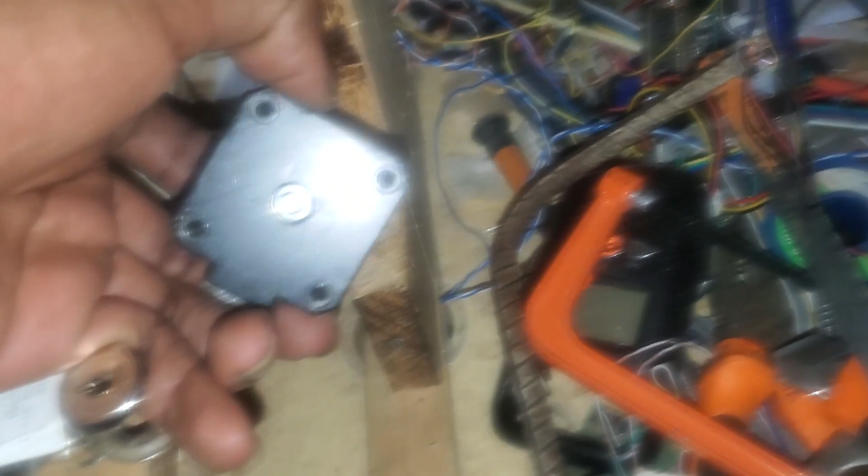Either that or I hadn't tied these nuts, so the torque it was giving me wasn't enough. It was here, it wasn't raising. Plus again this wood doesn't dampen the vibrations, so rotation was slightly difficult.

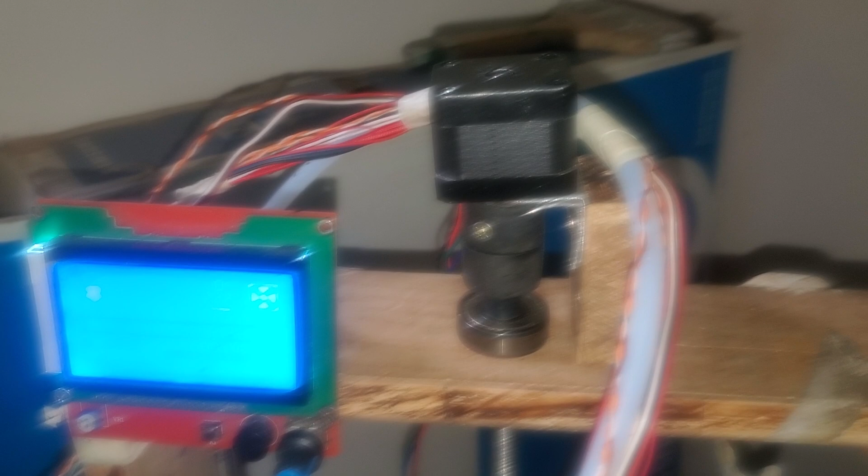This one, when I mounted it in the same place, at least it was giving me some movement, but if I was going like 10mm down, I couldn't achieve going 10mm. I was achieving like 8, 9. So I was seriously skipping.

Seeing that, I just saw that the imbalance in the weight is just not good enough. So this is the new mounting location. I'll have to cut this thread.

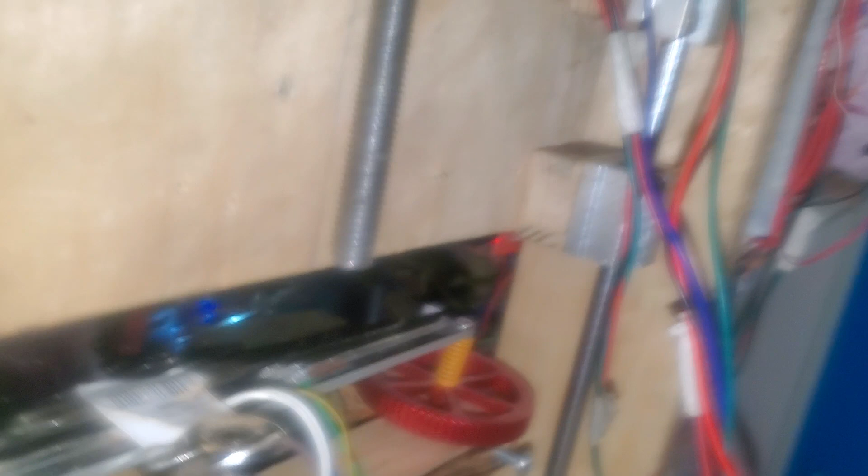As you see, there's an overhang. Currently, I've homed every axis to the minimum, so at least it's working. Even this one, as you know, part of this rod towards the back ain't working well, but with this new homing location, it's reaching its spot.

I've applied new tape, this masking tape. As this thing rotates, it wasn't gripping well, so it was roughly cutting as it rotates. It literally cut, so it's getting weaker with it. I'm sure I'm gonna replace that with time. I need to figure out what to do there, maybe eventually just drill something of the right size.

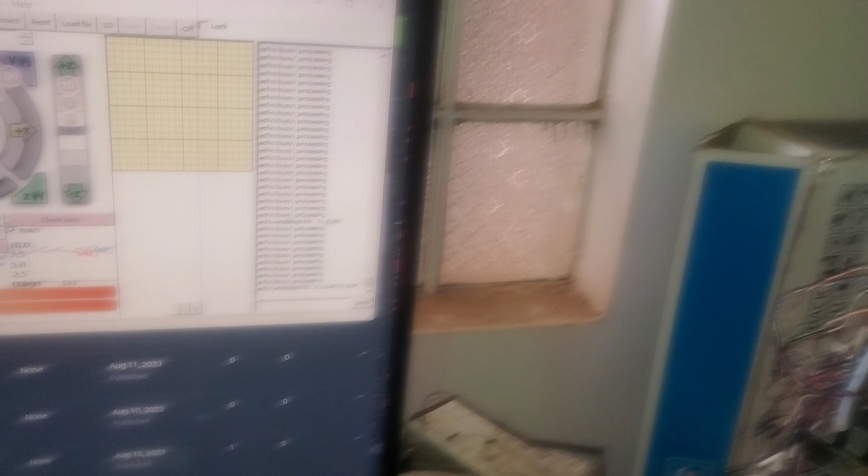Obviously, I've inverted the stepper. Let me show you. I've just inverted the stepper, one stepper only. So you can invert the stepper direction.

So for the Z, it's inverted because it's flipped. Originally, I wanted everything to be straightforward, upright, empirical. But as you've seen, I think maybe the force was the thread sitting on, everything was sitting on the shaft. At least this way something is hanging. So the end stops obviously are still in the same position.

So the plan now is to move all the axes to the max and then home it. After we home it, we're gonna speed up, roughly double the speed, and chase speed until we see where we start skipping. Where you start skipping is where you're gonna set our speed at.

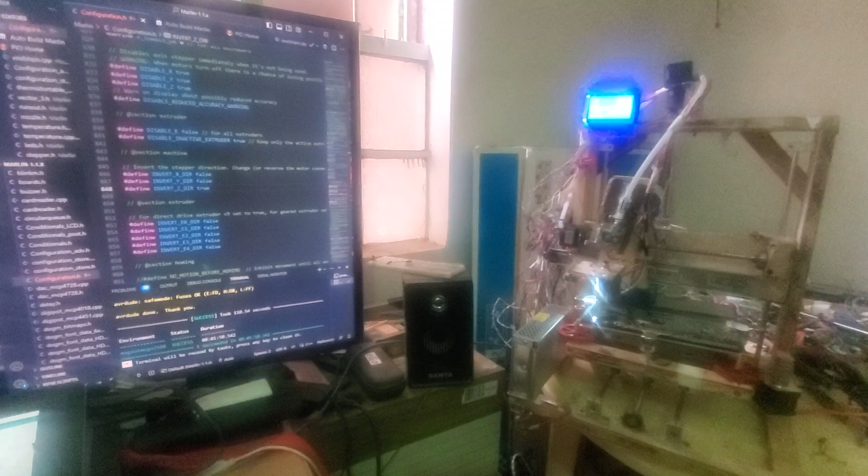I'm watching some podcast here, sandwich podcast. But yeah, it's gonna just be in the background or something like this.

So let's do this stuff. Need to return that back, bring this guy back here. There's some glare somehow, hope you just make do with it.

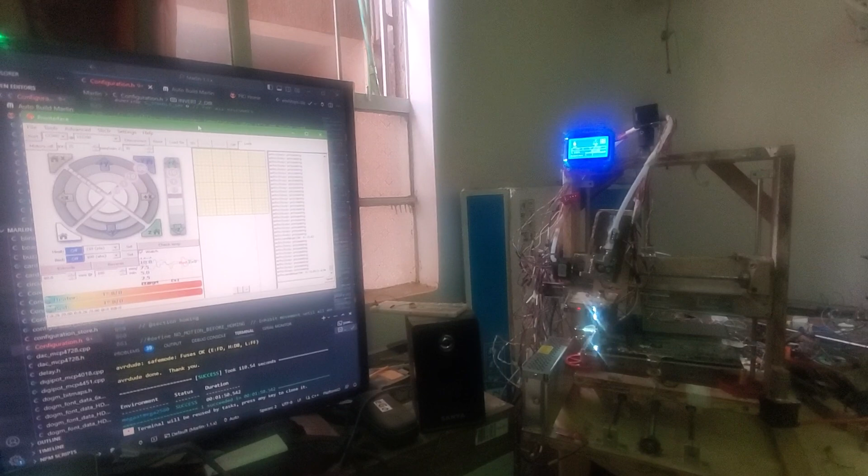So we're gonna start with the X, move 100. I'm gonna move the printer back to its better location. Let me just make sure nothing is in there.

So here, roughly, this is my line. This other line is unusable because the thread can't move past there. But I'm waiting for the new threads. I'm gonna obviously replace this, and this. This I'm gonna figure out what I'll do to achieve more travel. I might even mount this guy here.

But this, at the moment, is a better location. Because if I move this thing here, I'm gonna make the gantry heavier. So let it just stay here to reduce weight.

With the other builds, I saw a mechanism, the CoreXY mechanism. So I'm gonna use a core Y mechanism. I'll remove the motor from here, put it somewhere low. I prefer things to be low because of CG. Then put a belt that shifts with the gantry as it moves up and down. This will remove the weight from the motor off the gantry.

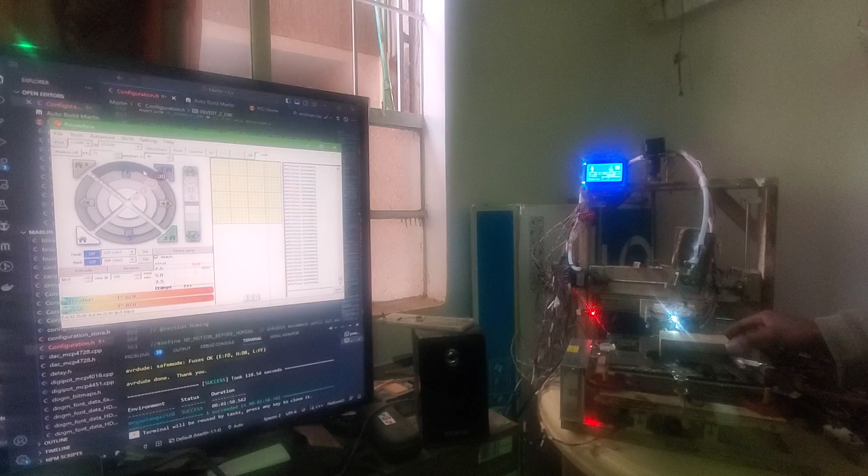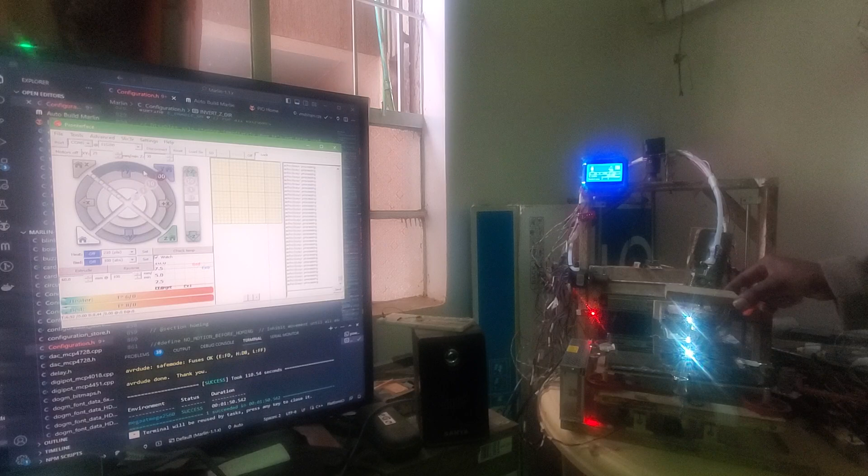And then height was 110 - I had a height of, because it has hit the end stop, so yeah, 110. So roughly 110 is up to here. So that's the maximum rectangle that I can print from here to here. That's not bad size, that's a good object.

Let me see what I can print here, something common. Too thick, slightly too thick. This is the maximum.

Infinix Z05 roughly fits, so I can print a phone cover comfortably. It has maxed out, this is maximum. Actually, I didn't even consider this - so from end stop to end stop, I have 150.

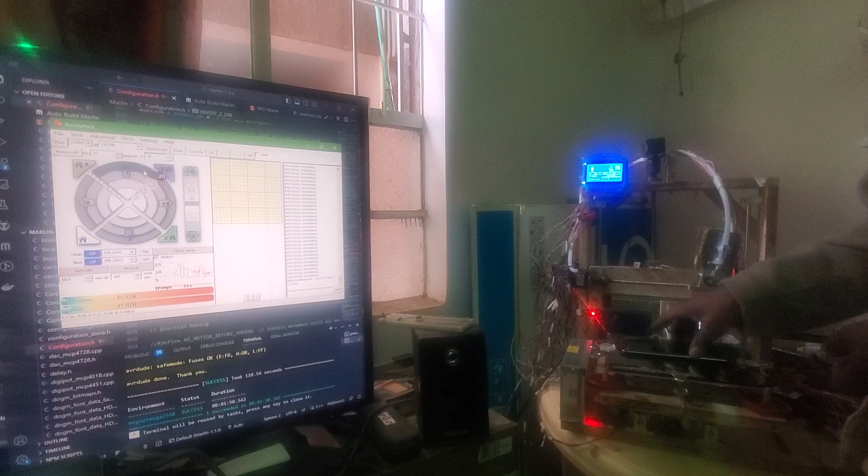Let me look for something I can print. A calculator, that's big. A remote, that's big. A mouse - obviously, a mouse can print. So yeah, I can print 3 mouses stacked upwards comfortably.

So let's go for the Z. After that, I'm gonna use the auto home button, the all-home button, this one here, so that I see it homing automatically.

After that, we're gonna now start using - I'm gonna start checking on the probe. The Z moves in steps of 10. So this is the second turn.

We saw I had what, 150? Not 150, one time. I'm supposed to click 11 times. I'm gonna click roughly 10 to 12 times. This is the third one.

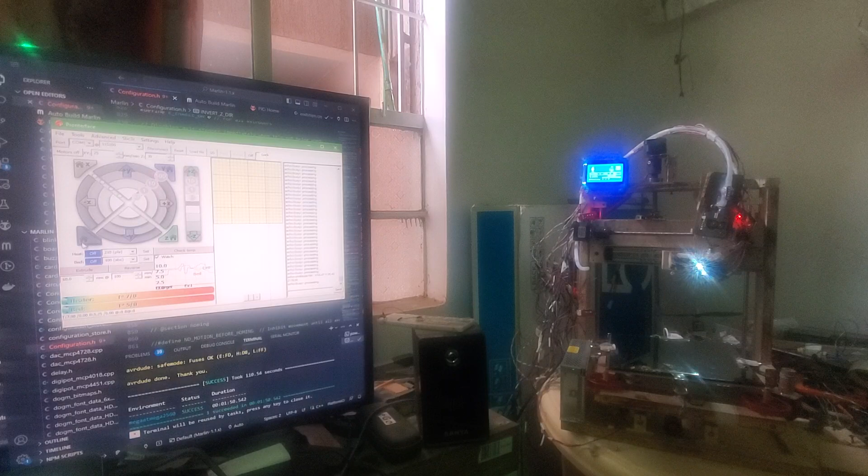Oh, it homes one axis at a time. I'm gonna change that in the code because I can't remember the homing speed, but its homing speed is slightly high. Good sign, you can bump up the speed.

I hope you can see the jerk. There's a form of jerk. It's as if the motor is stopping. If you can just match up the accelerations for it, you can almost eliminate the jerk.

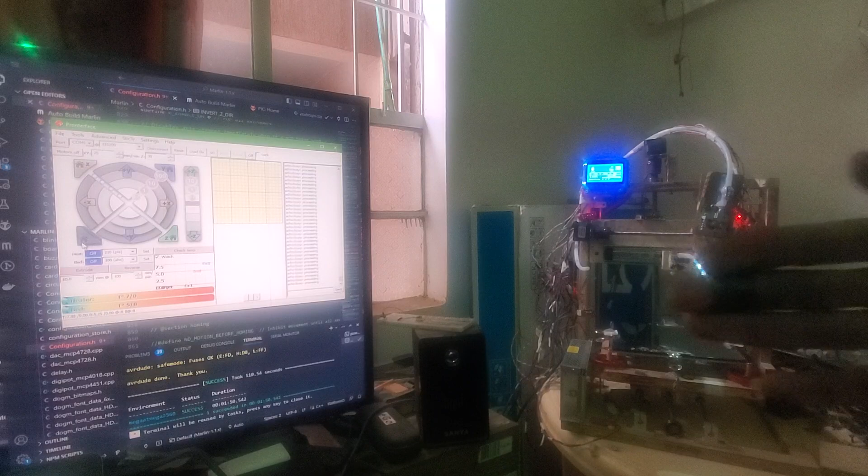The bed is dancing. It has hit the end stop, it has bumped, it's now going back. Maybe that bump is much. It's a bump of 5, so the X has homed.

Let's see the Y. You have seen, it has sagged, apparently. Then the stop has stopped being depressed. But I don't think it's that much. I don't think it will affect it.

So I have to consider my warping of my gantry. Not my gantry, my arm. Oh yeah, my gantry, yeah, my gantry.

Okay guys, I'm thinking of a robotic arm, but that's like a project that I'll do in like 10 years time. Let me first do this printer, then a CNC, then a plasma cutter.

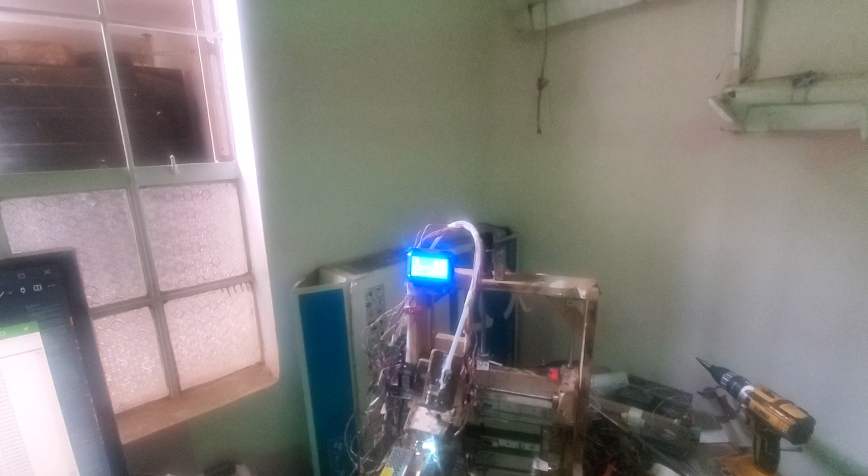But that's just moving one side. Now you can imagine printing a whole thing. So let me bump up the speeds. I'll keep informing you. So yeah, let me pause. I'll double check it just right now. No, just do it straight. Specific.

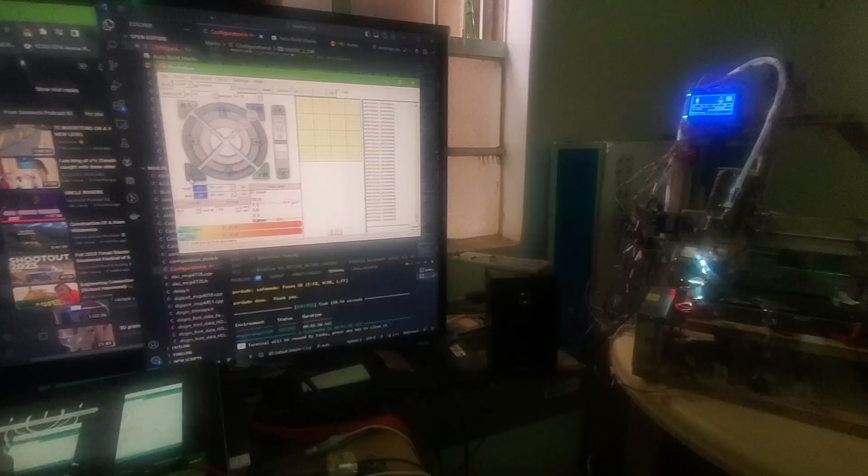I need a 50. I don't know where I get a 50. 25, so...

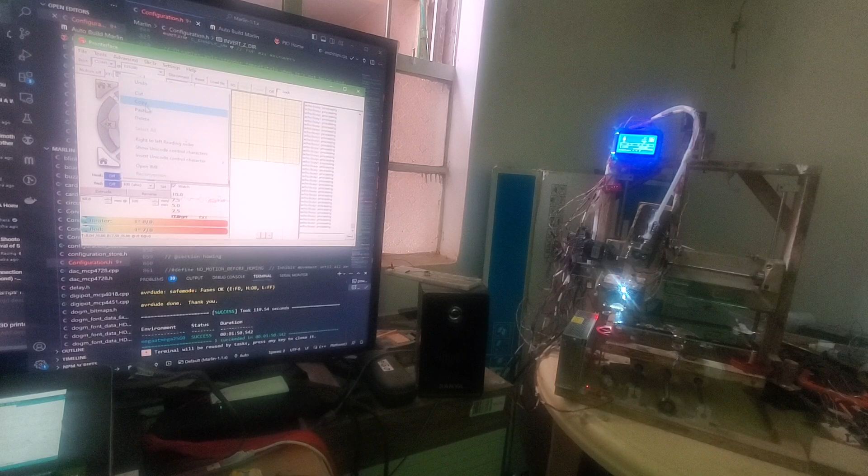Putting both of the speeds at 50-50. Originally it was at 25-30. Okay, here we go.

Okay, we are moving. And as you can see here at the far edge of the ridge, those end stops are really tight. These things are consuming a lot of space. Those clips.

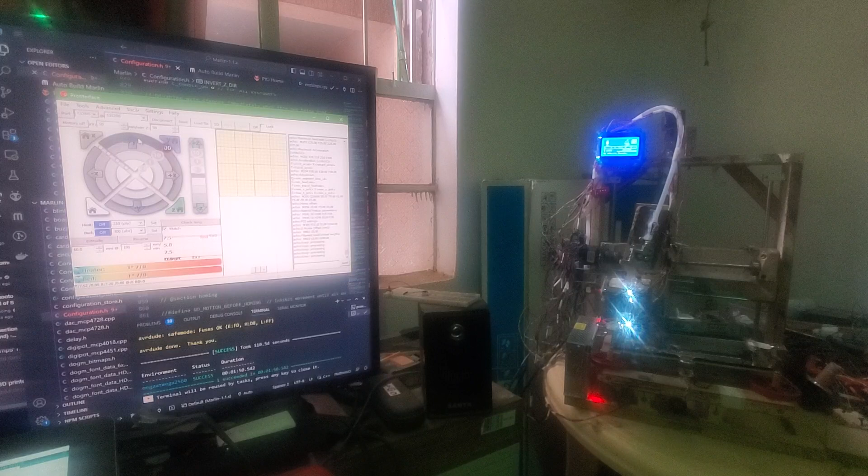Let's go further away. Okay. Just a good sign. I think I can achieve 200. I wonder how the Z will perform.

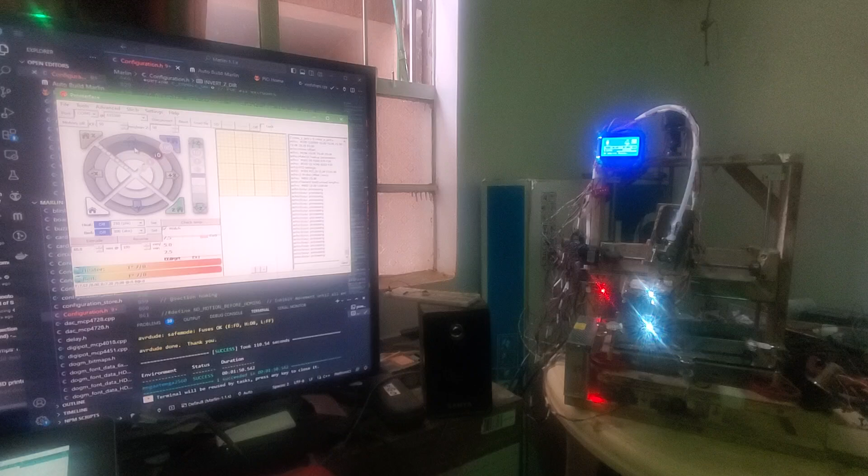I need to lube this stuff. I haven't lubed it. I'll just lube it. I'm gonna use just normal lube, the one for bicycles. General purpose lubricant I use for sewing machines, bicycles, and domestic use. Yeah boy, domestic use. Because this is totally a domestic build.

But I still have this in the name of cooling, so it's engine oil.

And my tube is sagging, so I think I might eventually end up cutting it. Might be too long. Even if I put on like an enclosure for it. And the Y axis box, that's the why. So easy.

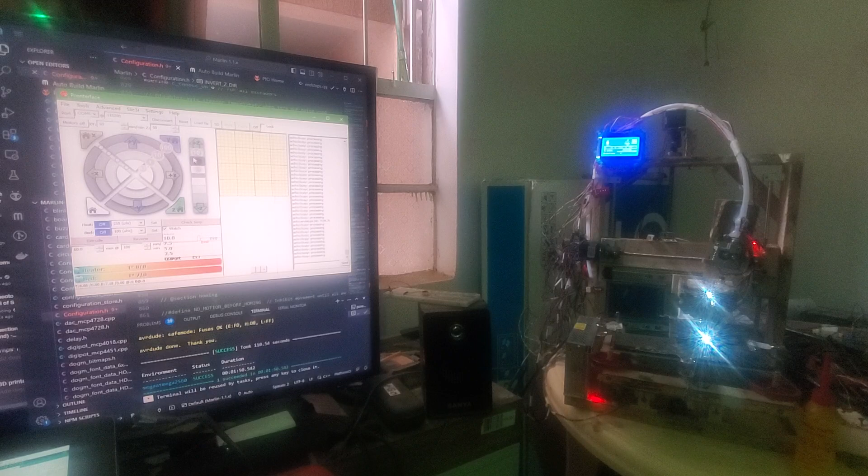Okay. Yep, we are skipping. Not really skipping. I like to call that a skip. So let's know if you're skipping. That's one. Pressed it once. Last time we counted 11. 1.

I think the Z, you can't bump the speed that much. 2. This is giving me chills, man.

Oh, also one of them I noticed I hadn't tightened this thing. The nut was loose. It has stopped too. This is 3, isn't it? 2, it's confirmed.

So 3. We are either at 3 or 4, so but I'm gonna say 3. You're skipping heavily. Yep.

50 is just too much for Z. I don't even know why I'm rushing the Z. Because I'm doing a layer print, so I don't really require the Z too.

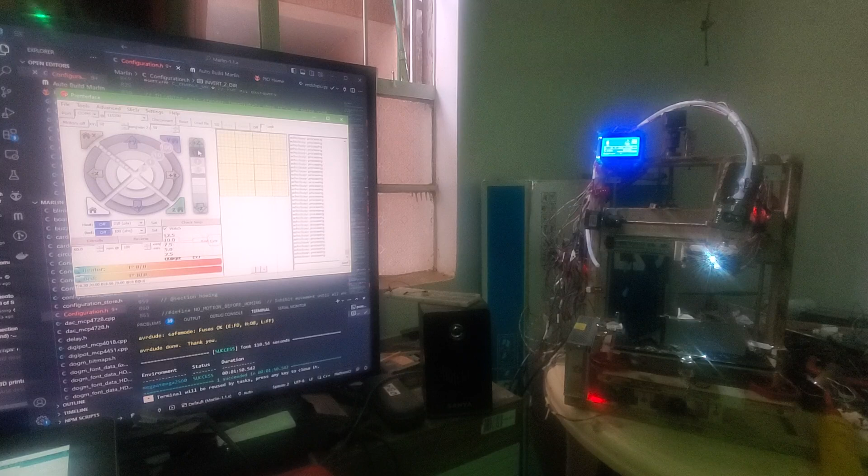Let me say now we are at 11 now. Hope you can see it's struggling to move. It's just vibrating.

No, 14. 15. Hey, I think I'm just gonna maintain it at 30. Let me look for a 30.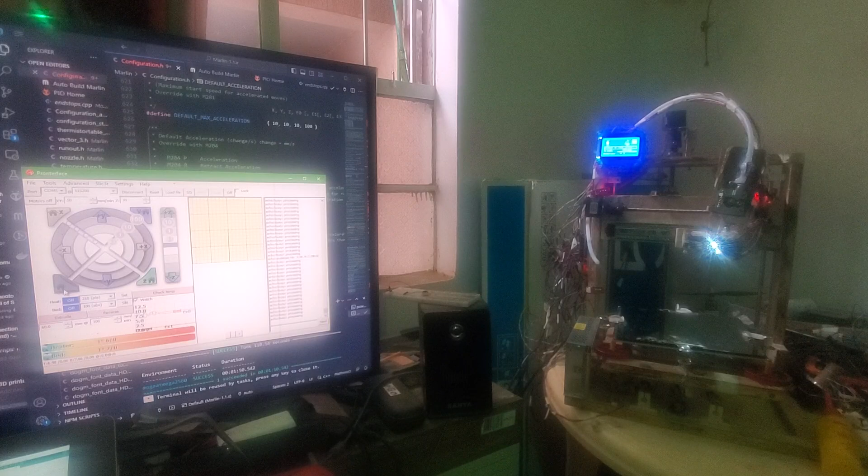That's for the X and Y. For the Z, just 30, 30, 30, 30, and you're homed. After we've reached 200, might double the acceleration for the X and Y. For the Z, I'm not gonna touch it.

I can't wait for 100. Let me even copy it right now.

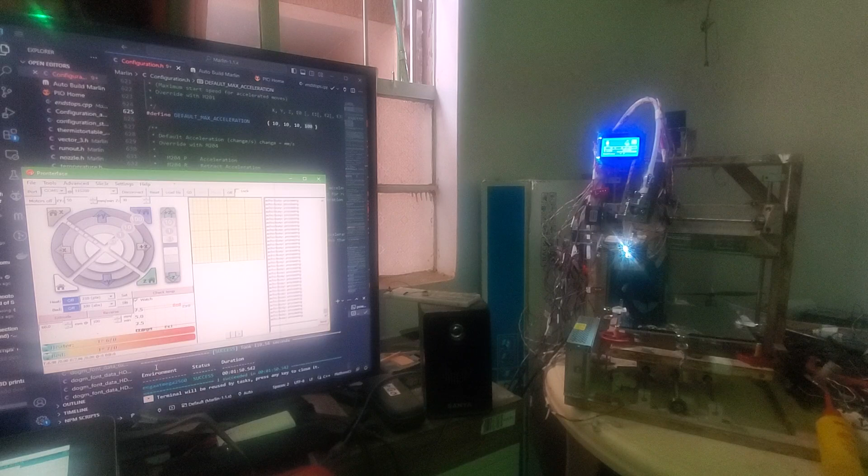But I'm at 30. See, if I get stuck going down, this bad news means things are getting loose. Let me just show you how much this thing is dancing for me to achieve movement.

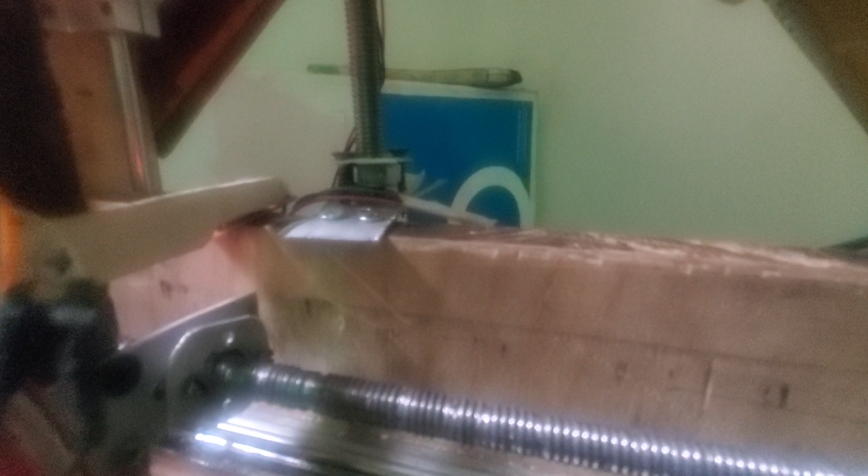This thing needs to be that loose, and it's getting loose. I untightened it, because if it's tight it doesn't hold. Either that or it's getting loose, and I don't think it's getting loose because I added some straps to tighten it. It's getting loose.

Okay, these are some of the few things I need to maintain. It's even nice I had taken a close look at it.

That's a form of maintenance issue, something has sort of worn out. Is it warming up? Is it up slowly?

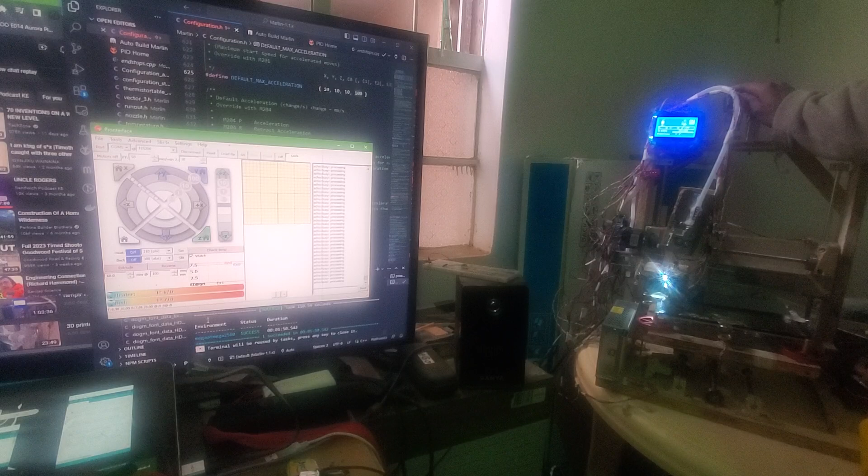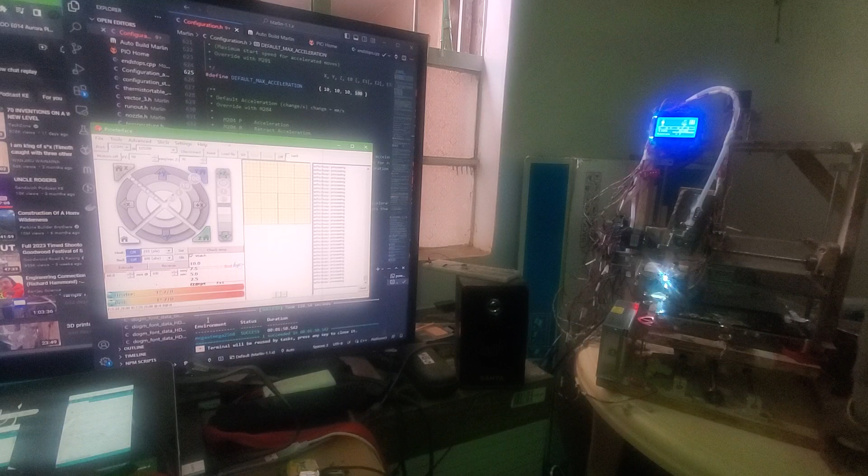Has it hit the end stop? It has, it has hit the end stop. Let me tighten, so that we can, or if you can increase the speed.

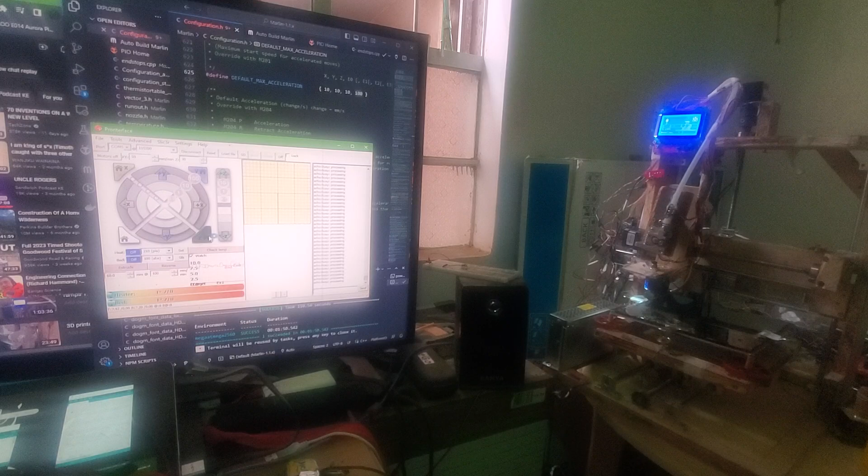It just, wait, just about to start to feel that. And we home it. Still stuck.

If it's too, goes too tight, it goes. Switch. Let me just a minute. Let me see if I can. What's up?

Let me just assume that axis for the moment. Let me see what I can get up this. I think maybe the bump up has affected my PWMs.

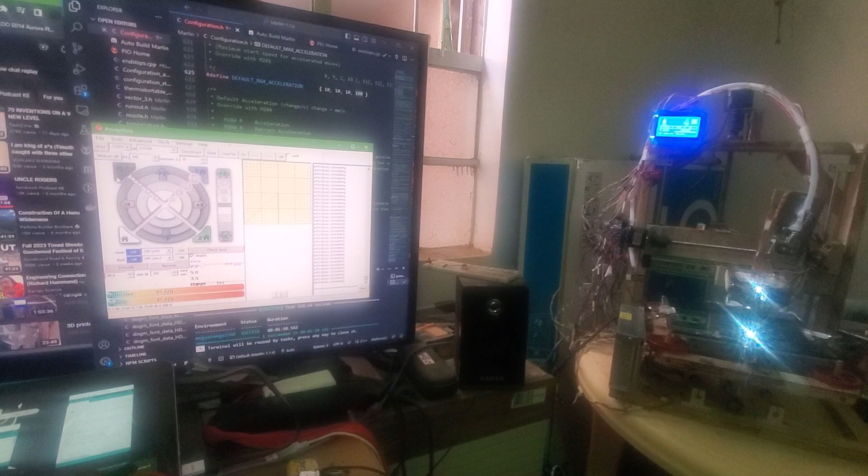That doesn't look like 100, it looks as if it's going slow. But the X, so if I'm printing something long, apparently this is the short axis. This printer is becoming complicated by the end of the day. I'm so sure by the time I'll be able to print, I'll be printing something from here to here if I want to print fast.

Hope the end stop works. We are at 200, we are at 100. So let me look for a 20, a 2. We have a 2 here. After this, we stop our speed test and probably call it a day.

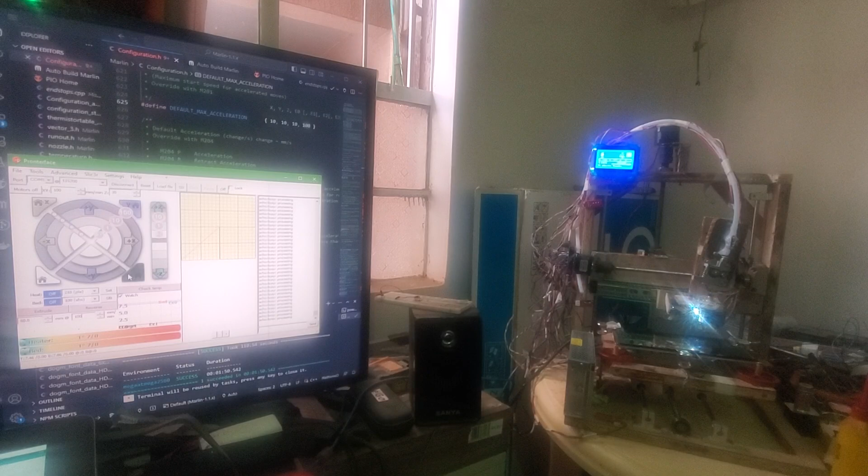So we go for the Y, then we bump up speeds. I need to remember to drop the linear rail on the left side slightly down, just slightly down. I'll have dropped it right now while it was in that position, because I want to go for 200.

You have to bear with me just a minute, because I've seen this thing to locate it. Let's see that.

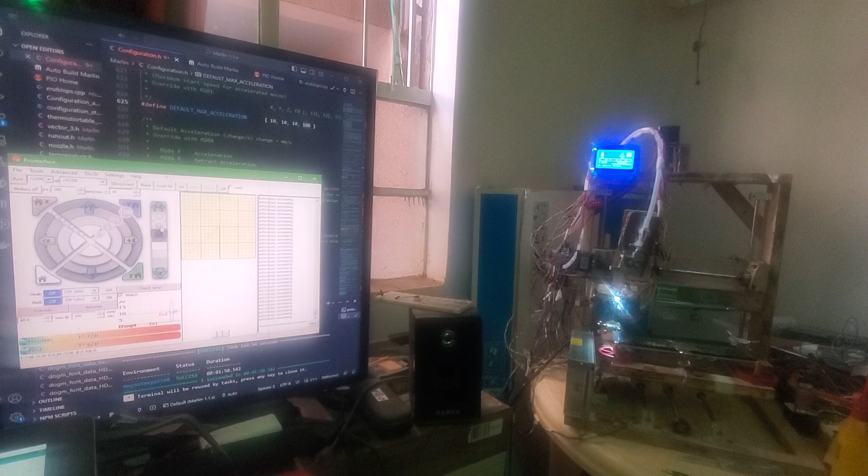These NEMAs are working well, but they're impressing me. I've seen people print on some really fast speeds. So yeah, here we go. 200, if it goes well, we go to 400. Okay, let's see.

Yep, too fast. Should I stop it? Just let it go. Yep, and it's gonna go like that until we hit an end stop and it's not moving.

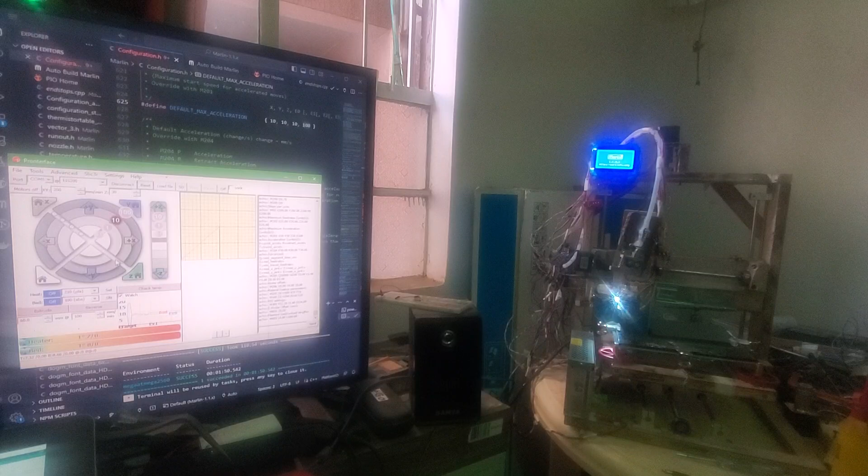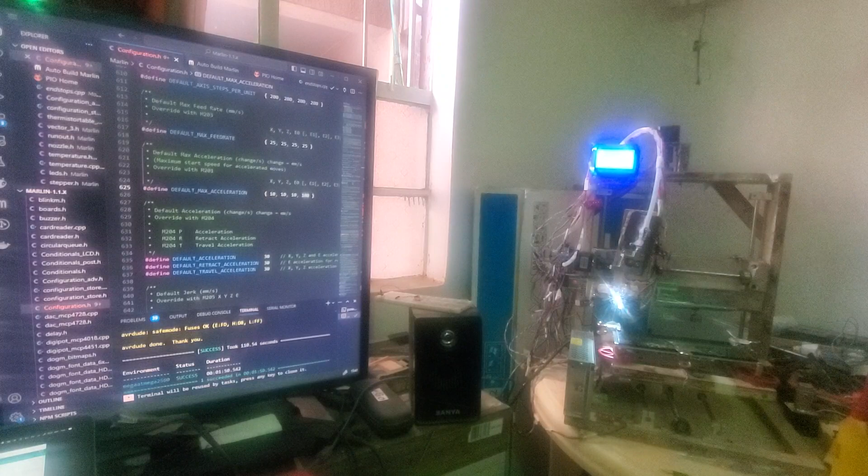Ooh. I don't know, it's like a hand vacuum cleaner, but... so yep, I can't achieve 200. It's roughly a disappointment.

Higher, 150. If I just have a good rod, because it has just picked up speed. I have a lot of play. So roughly this is my opportune area, this is my best print area.

This section, the thread is too rough. This section, the thread is too warped or bent. In this section, I don't know how the Z is going. The Z apparently catches and then goes. Yep.

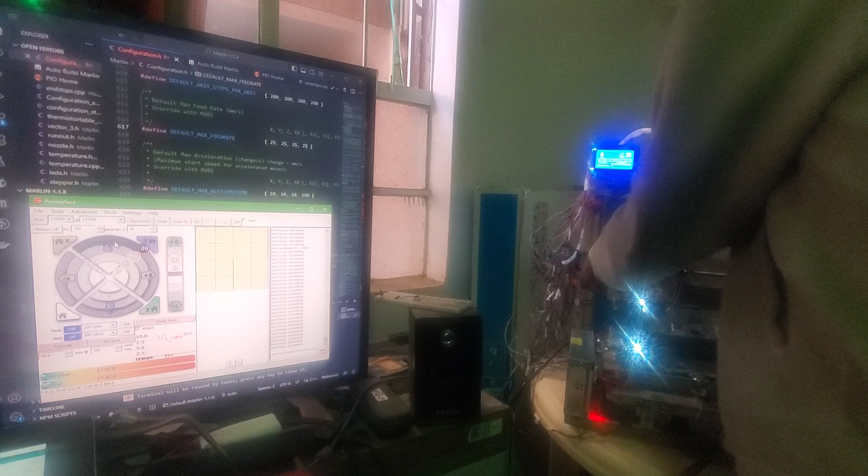I want to test it at the end. Let me try again. This thing is no, it's just too much.

Just have to stick to 100. Let's go back to 100. We make sure the parts haven't... it's not a failure of the parts. Just for the same axis, because the X has gone well. Oh yeah, at least.

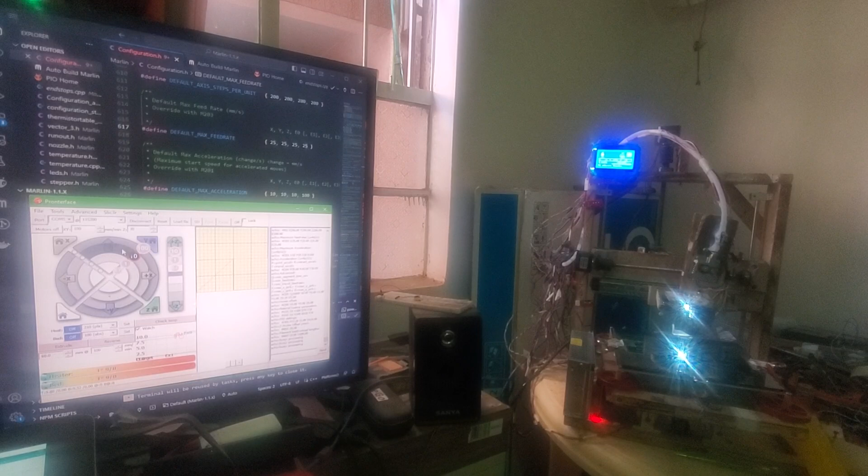So 100 is good. That even makes it easier for me because I don't know what my extrusion rates are at. 100 is pretty reasonable, and stop. It does what? What's the problem? Yeah.

And I can't max out my bed, it has reached here. So the maximum bed size is up to there. From there to there, from there to there, and then 100 roughly. This level.

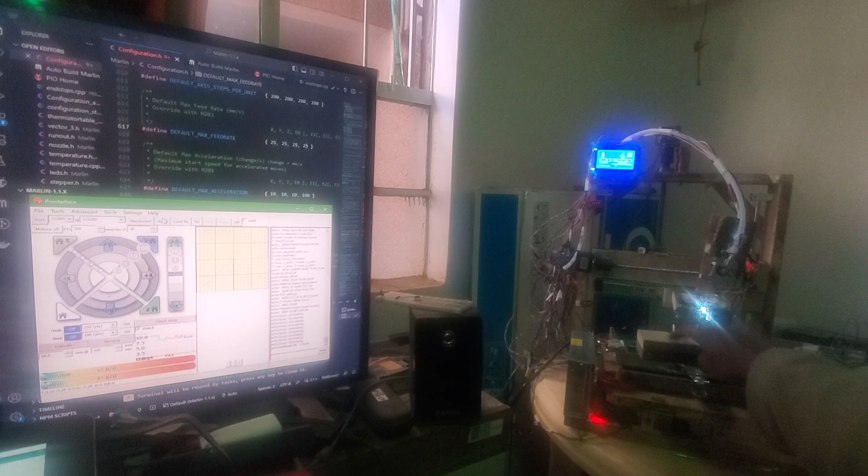That's something printable, so yeah, I've maxed out about 100 mm per second. Not even gonna try to touch an acceleration, let it just remain at 30.

But the X can move. I think it's because it just had a better setup, plus that pulley is holding it well. If you can see well, you have zoomed.